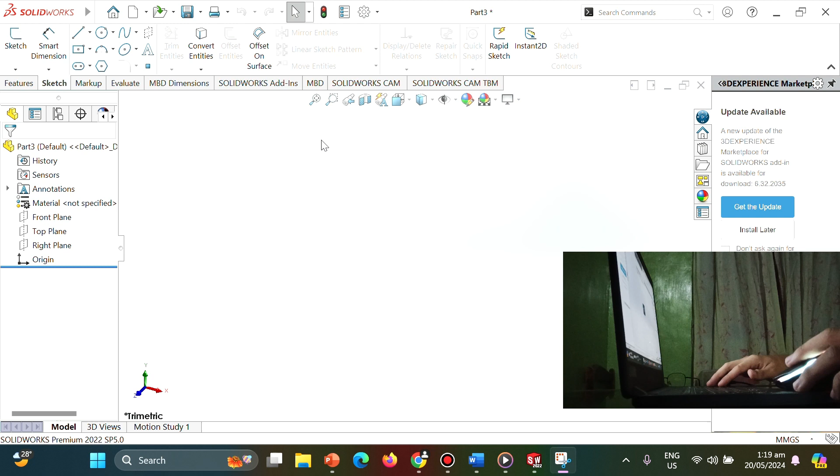So today's video, we need to make a spur gear that I choose in a model part.

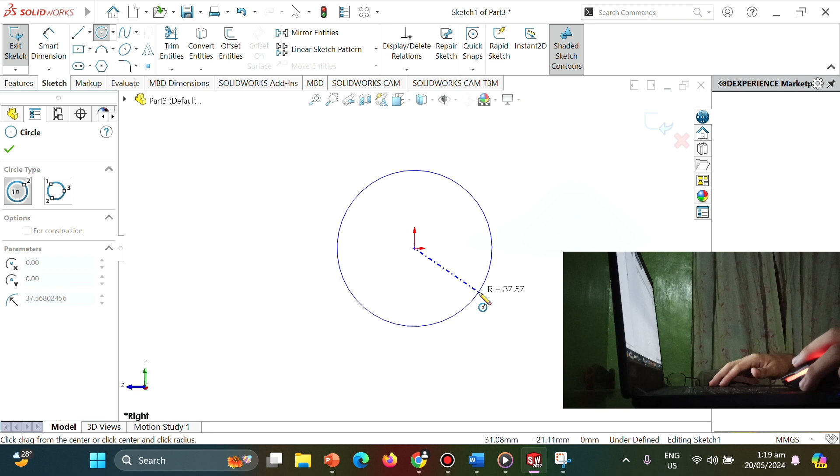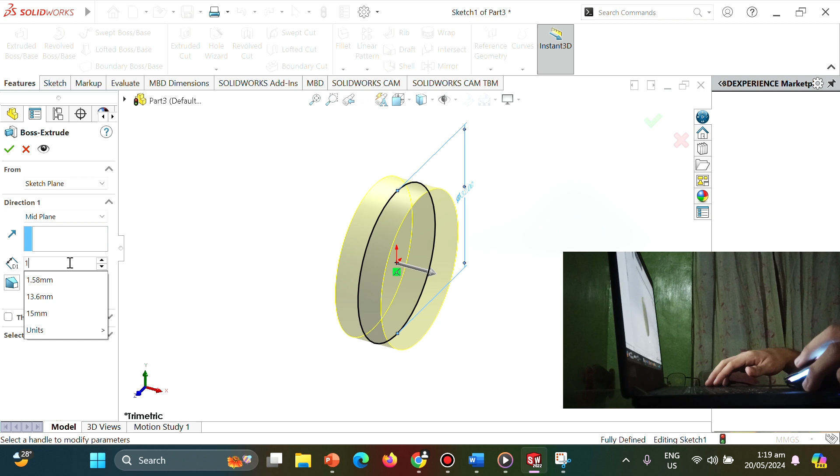First step will be sketch and select the right plane, and do a circle to the center of origin with the smart dimension of diameter of 32 mm. Then click the features and extruded boss with mid plane, and the size will be 15 mm.

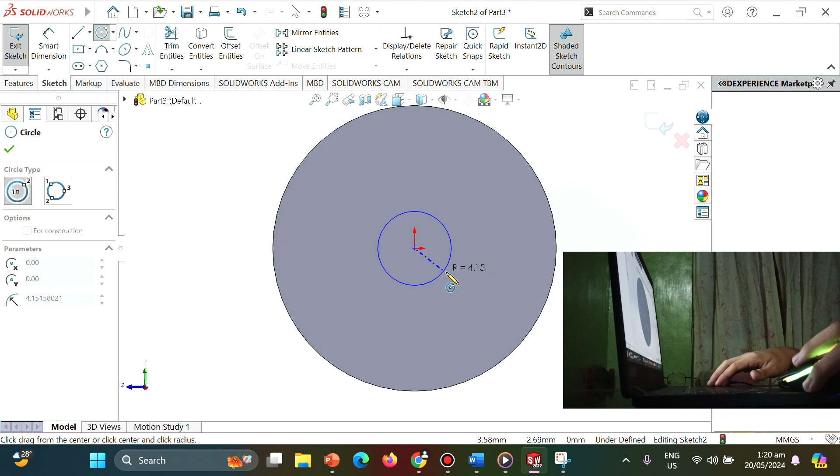So check, and then do sketch again and click this side, and do a circle to the center of origin and dimension it. Diameter will be 10 mm.

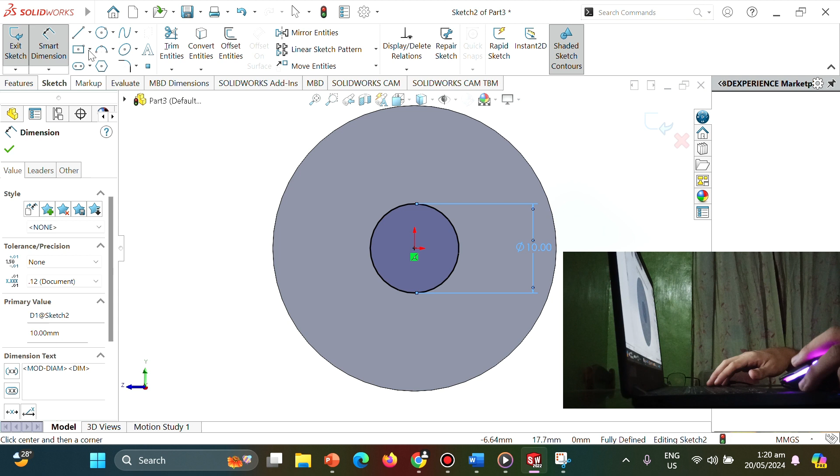Next step will be rectangle. Put a rectangle in our part of the circle. Click a center rectangle and dimension it. Each side has a dimension of 2 mm.

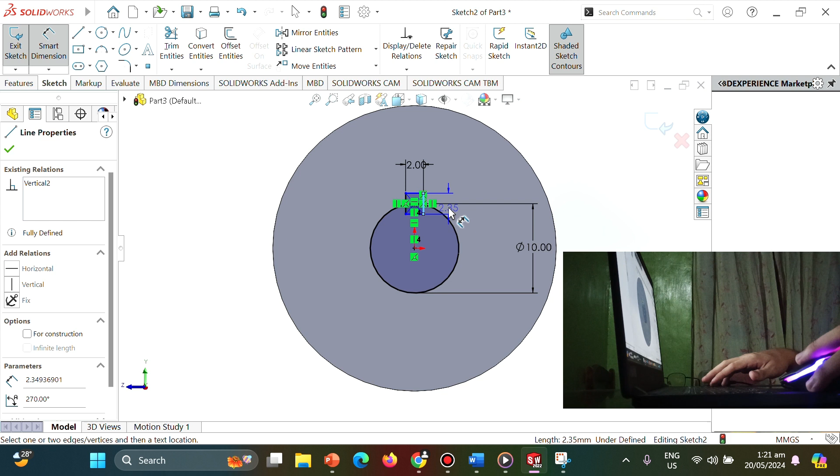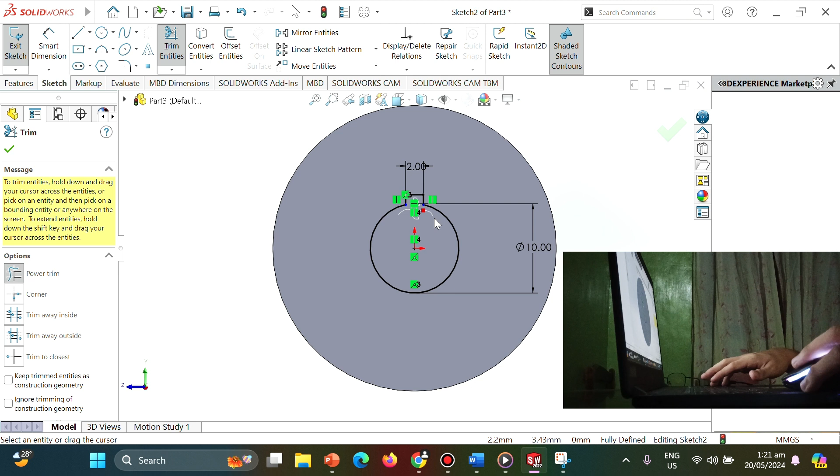So okay, next step will be trim the material unwanted portion. Check, and click the features and extrude cut, click through all, and check.

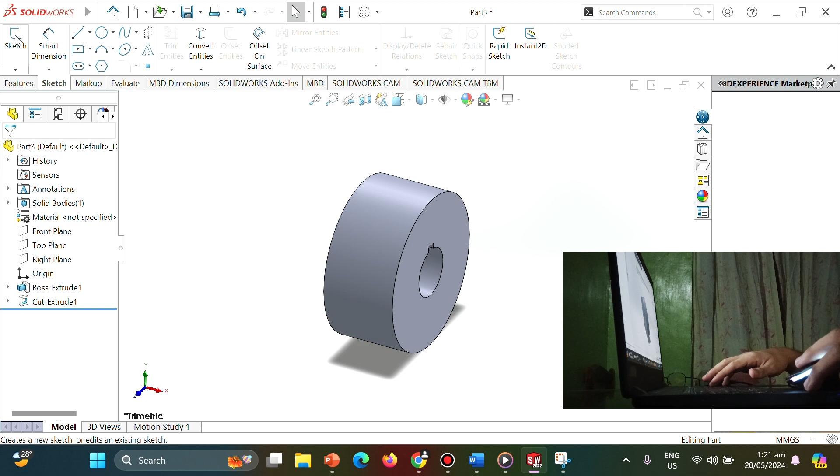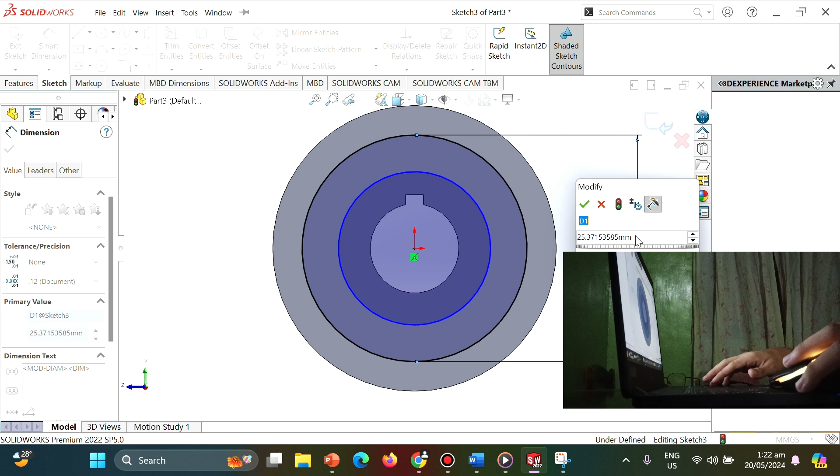So this is the step. Next step will be sketch and click this side, and do 2 circles. To this big circle, the dimension will be 25 mm, and to this circle will be 15 mm.

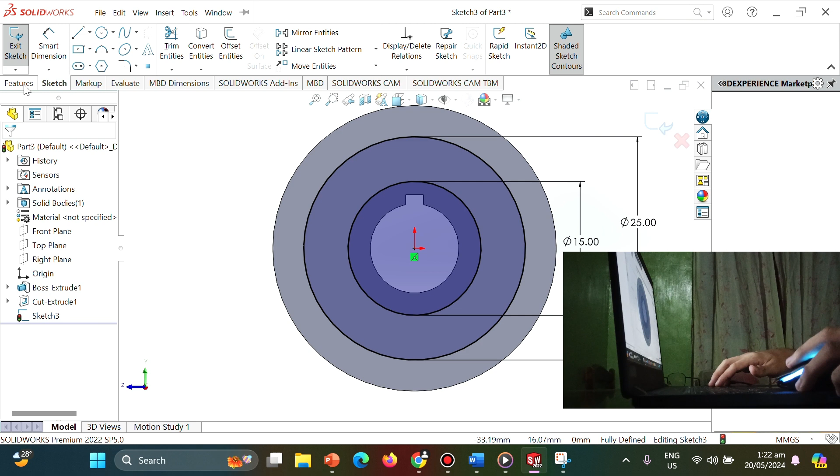Check, and next step will be click these features and extrude cut, and click the blind with the diameter of 3 mm. Check.

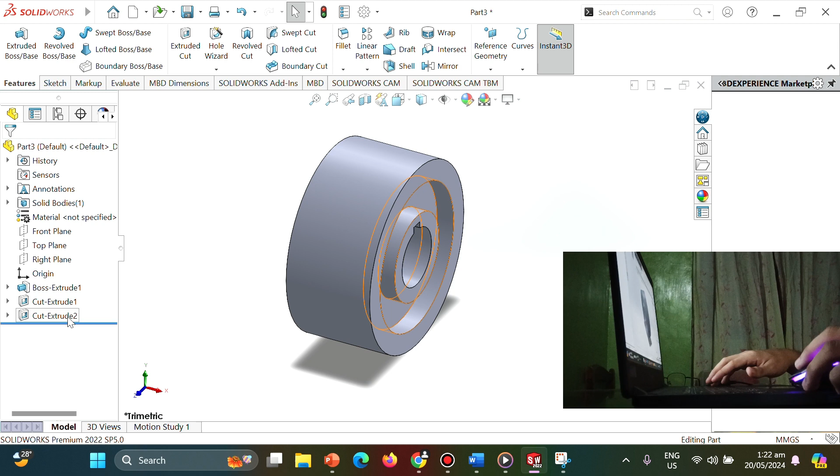So we have a size, the shape, and next step will be click this cut extrude, mirror, and to this part, right plane, and check. So we have the same.

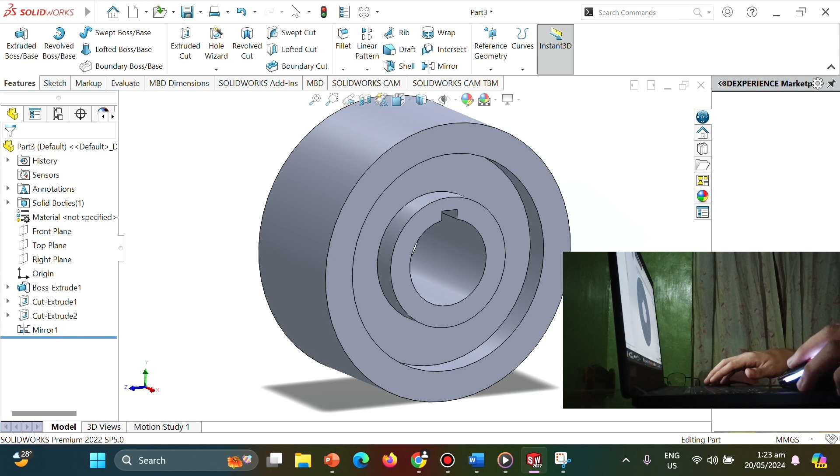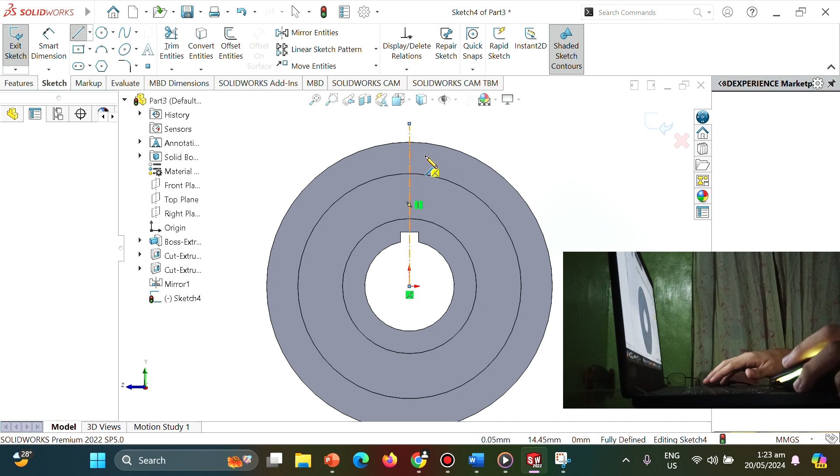So normal to again, and next step will be sketch. Click this side, and do a center line, and again line to this direction, and with the smart dimension of

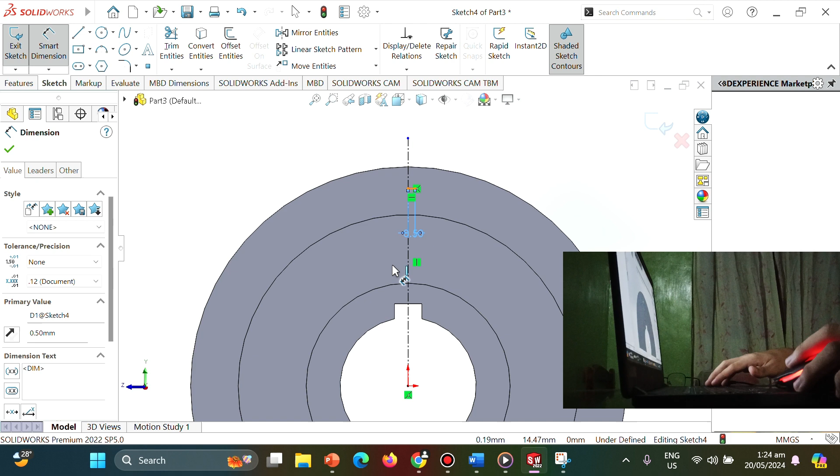0.50. Click this line, and to center of origin with a diameter of 13.60 mm, and so on.

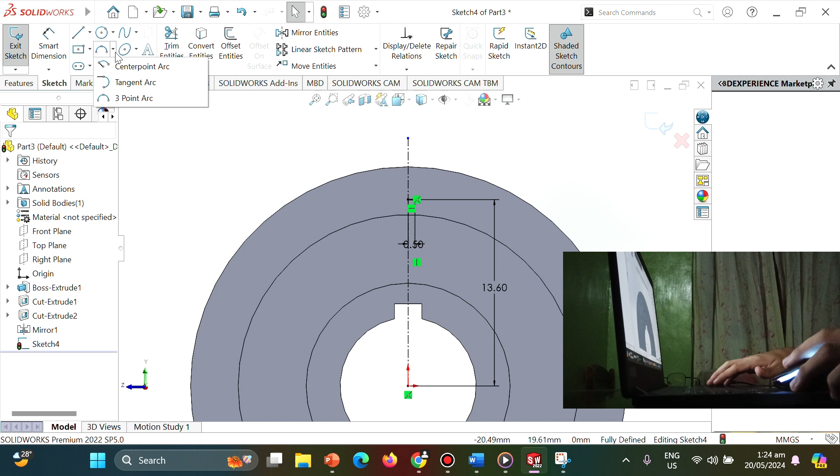We need to, next step will be click this 3-point arc, three-point arc.

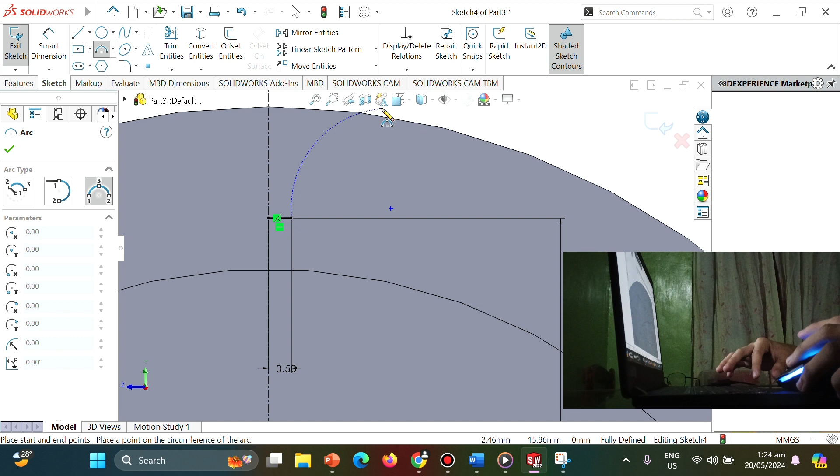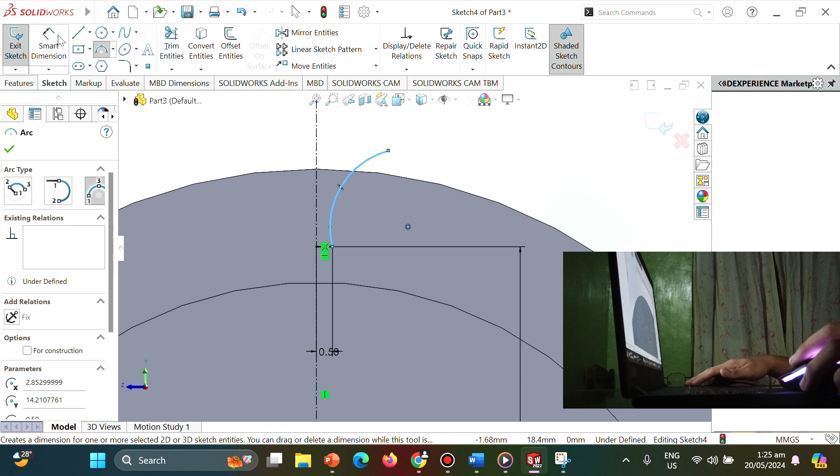Click again. We need to fix it properly. Click, and next step will be smart dimension.

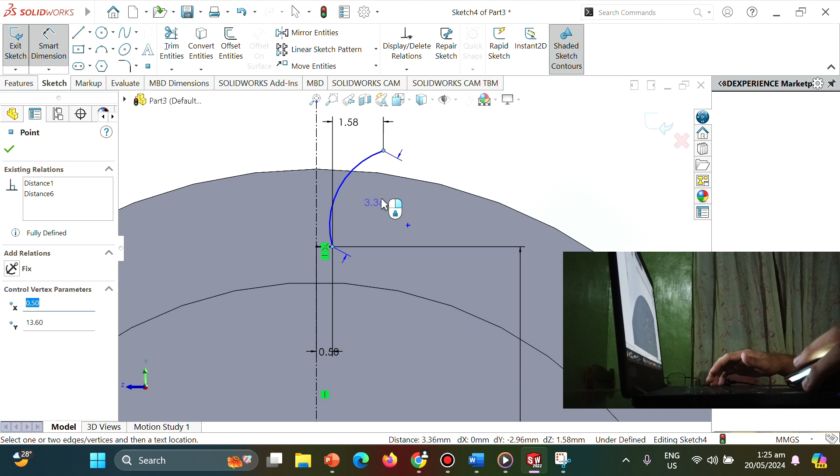158. The dimension will be 1.58, and to this side this will be 3.28, 3.28,

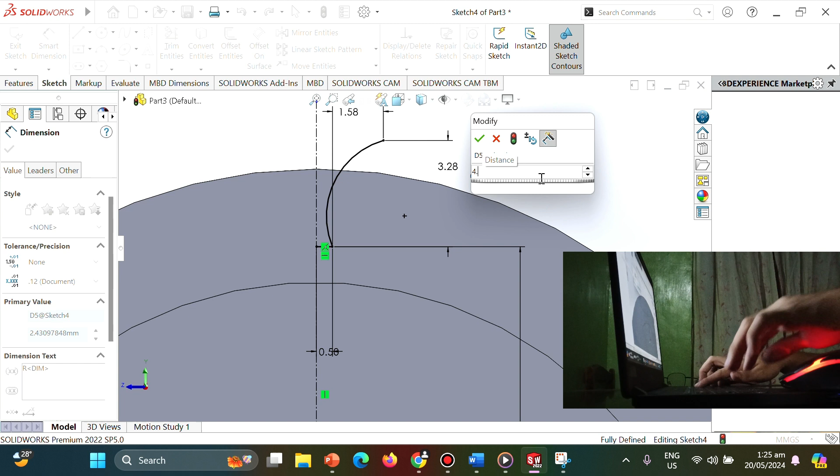and the size of the arc, the radius of the arc will be 4.56.

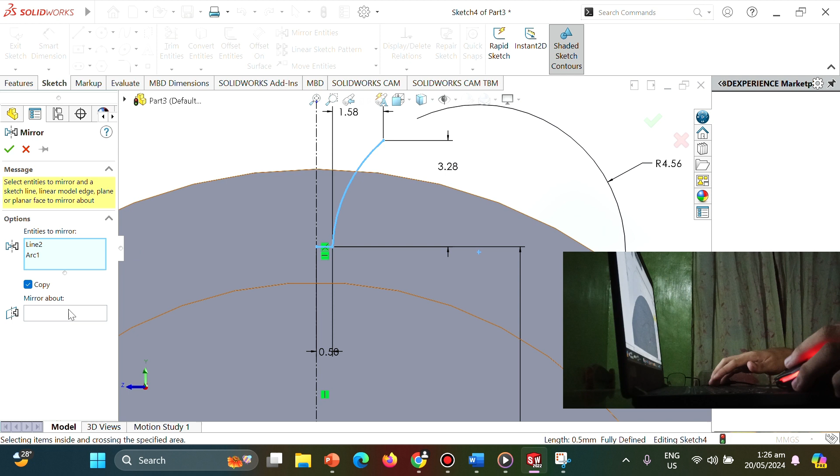So check. Next step will be mirror entities. Need to click this part, again, that fix it, and then mirror, click this, check. Now we have the same side.

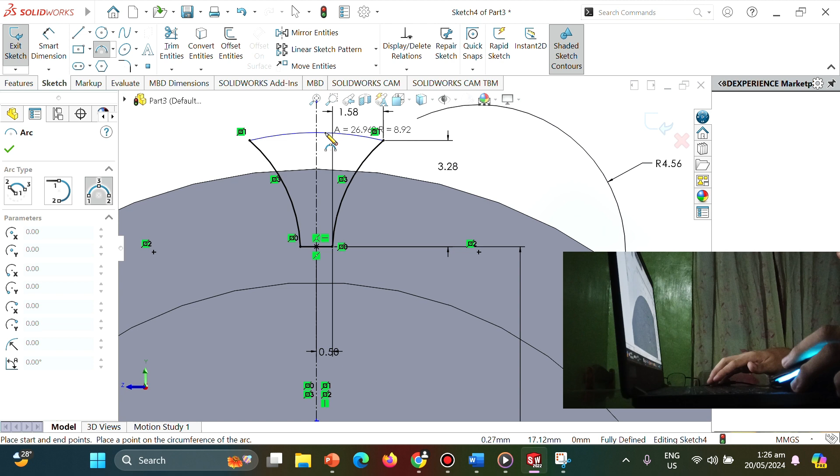Next step is 3-point arc again. Click this and this, fix the line, and smart dimension it as the diameter of 18 mm,

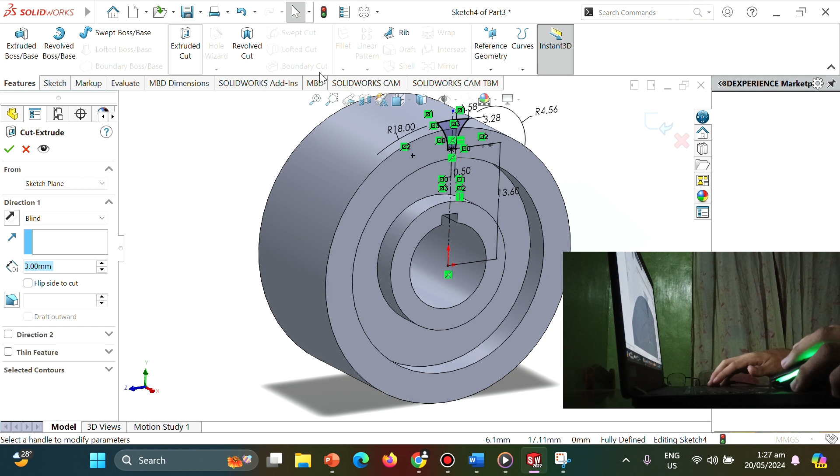and check. Now next step will be features, and do extrude cut. So through all, check. Now we have the extrude.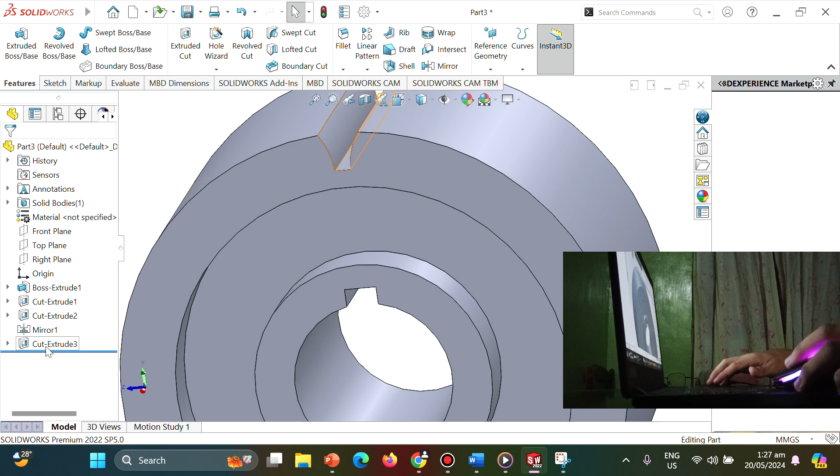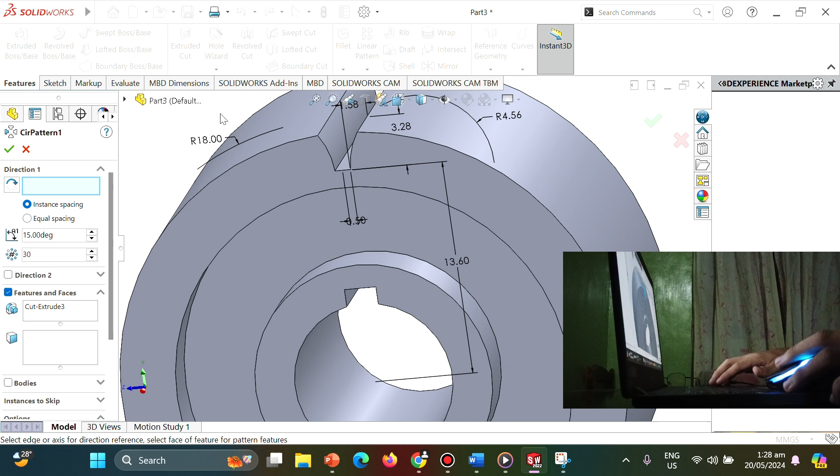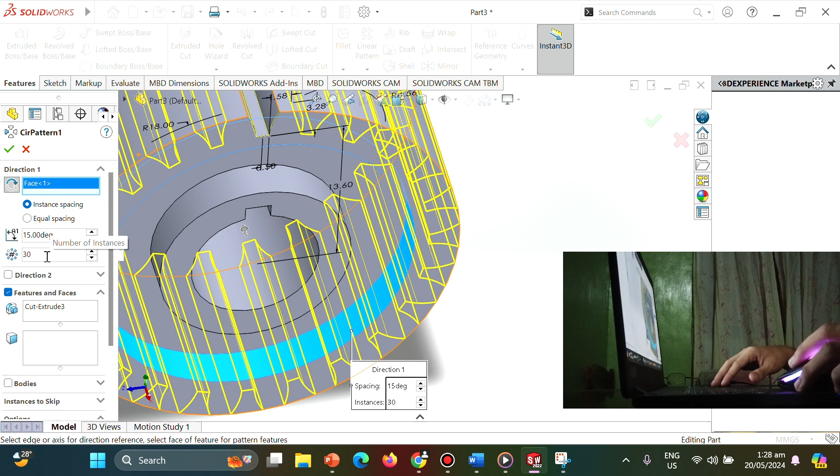So for the next step, click this and click this, linear pattern, circular pattern, and click this side. Click this side and check with the 15 degrees, okay, and 30, correct, and check.

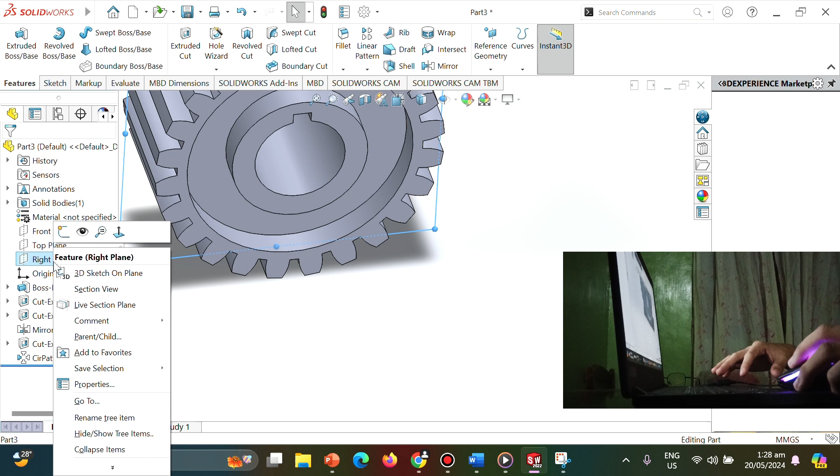So now we are finished. This is the final. Let's fix it. Now we have a finish.